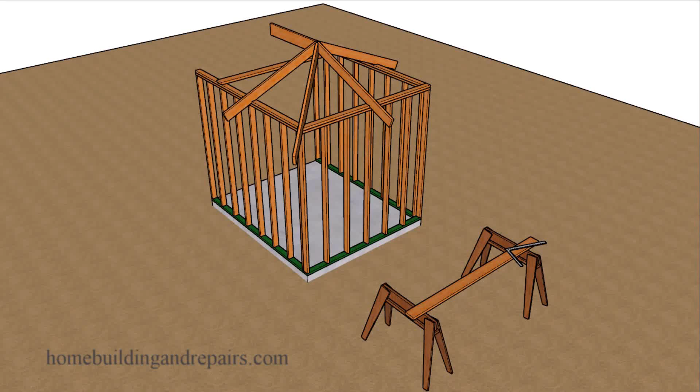In this video, I will provide you with the method used by old carpenters, before the calculator came out. It's rarely used today, but that doesn't mean you can't benefit from this method. It might be easier to understand and something that will work for you.

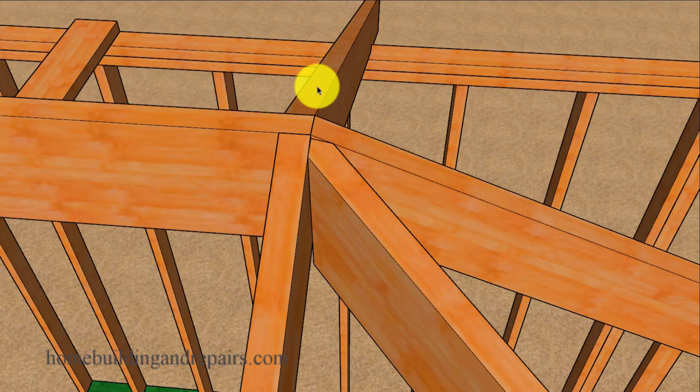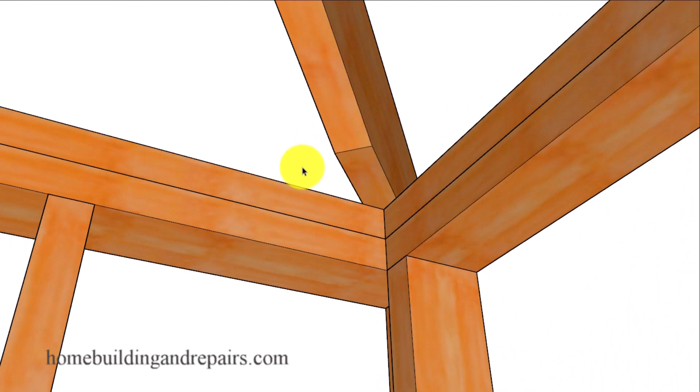The first thing I want to do is show you how we're going to use three common rafters that are exactly the same size to locate the intersection point for the hip rafter. This is probably the most common method used. However, the hip does hang down a little bit and it will protrude past the framing plates. Nothing you can do about this either, or should I say, you might be able to do something about it if you use smaller lumber or wider framing plates. And of course, the seat cut here.

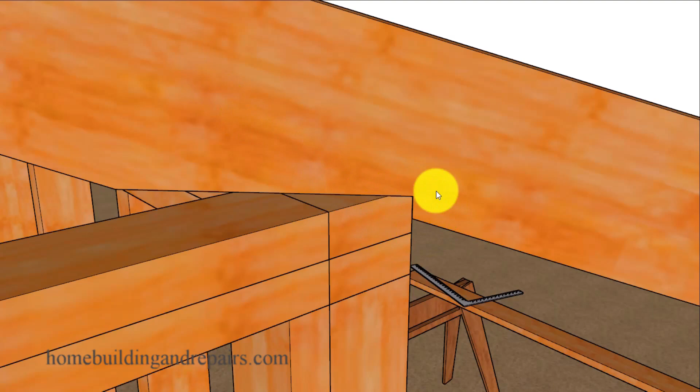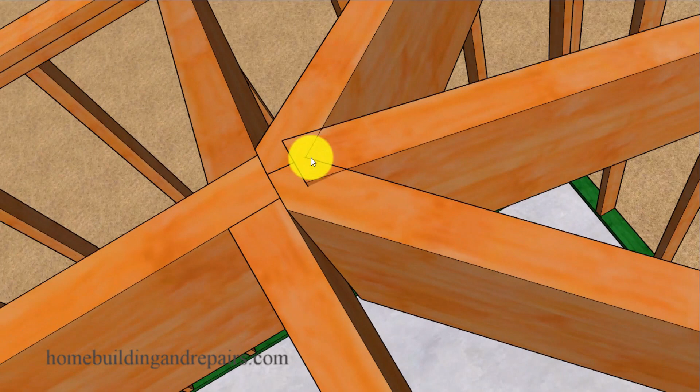Now let's take a look at the second method, the one we're going to be using in this video. It's going to have the same seat cut on the bottom, however at the top we will have a different cut. I went ahead and left the other common rafter in to give you an idea of what we did, along with how far we extended the hips to make it work. This design will provide the lower section of the hip with a little more support as it rests up against the ridge.

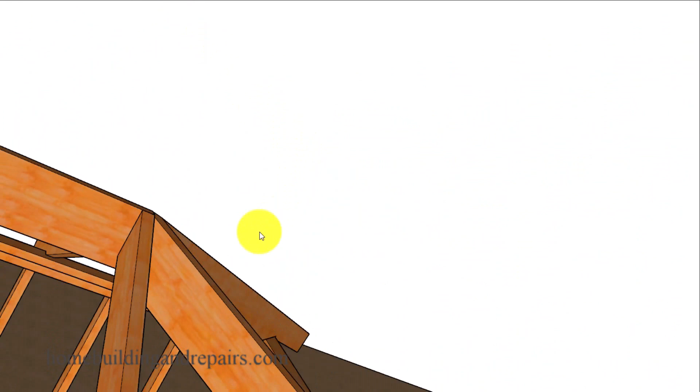It's common to use a larger board for the hip. In our example here, we have 2x6 common roof rafters and 2x8 for the hips and the ridge. Even though I'm using this method here, you can choose either method to lay out your hip rafter.

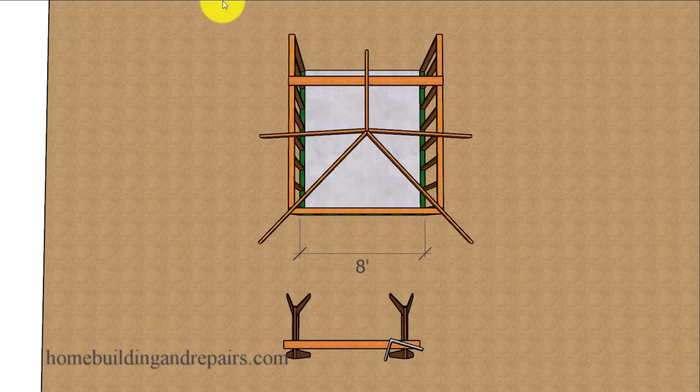We will be working with an 8-foot span, 8-foot distance over on the outside of the wall to the outside of the wall. If we divide that number in half, it's going to provide us with 4 feet. When it comes to laying out our hip rafters, we're not going to be using the 12 inches anymore. We're still going to be using the 5, just not the 12.

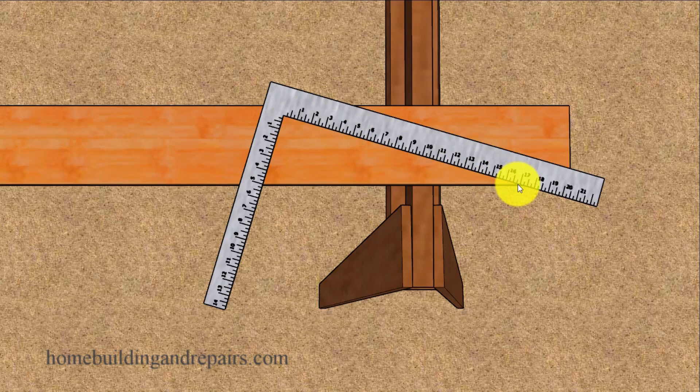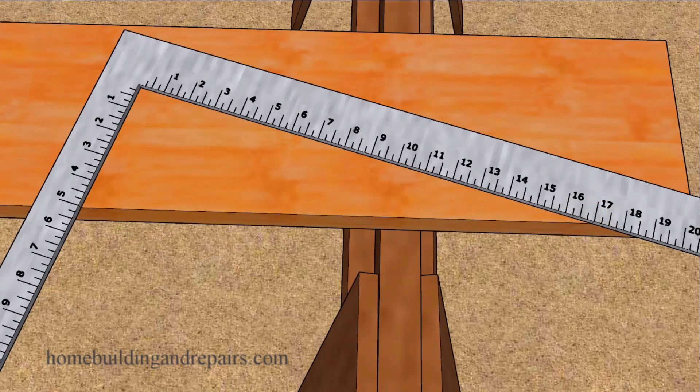Next up, let's go ahead and zoom in here on the framing square. You can see where we have the number 17 and the number 5 here, where we're lining up this part of the framing square and this part with the edge of the lumber. So again, the number 17 here and the number 5 on the other side.

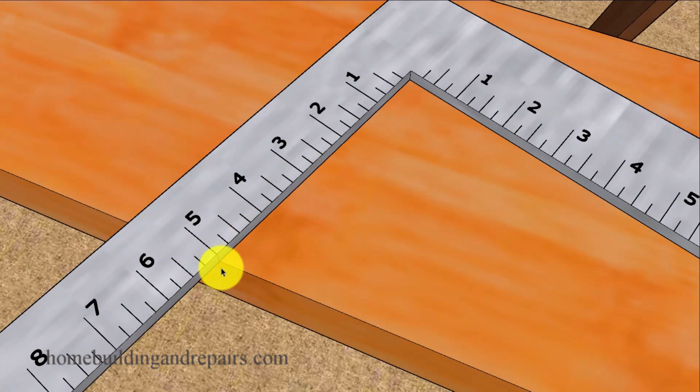You will change this number here if the roof pitch changes. For example, if we were using a 3 and 12 roof pitch, then we would be using the number 3 here instead of the number 5 and lining the number 3 up with the edge of the board. That's probably the only change you're going to need to make when laying out a hip roof rafter with a different roof pitch. So the number 17 will stay, this one here will change.

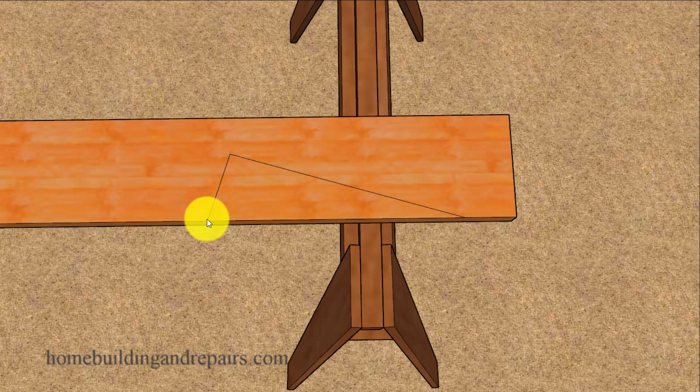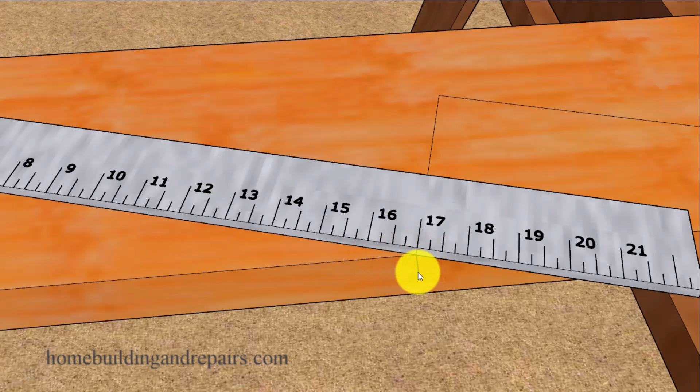The next step will be to mark the inside of the framing square with our first section so that we can move the framing square or slide it down while lining up the same numbers again. So we're going to line the number 17, the inside of the framing square, up where this line intersects with the outside of the board. I put a little mark there to make it a little more clearer or obvious about what we're doing.

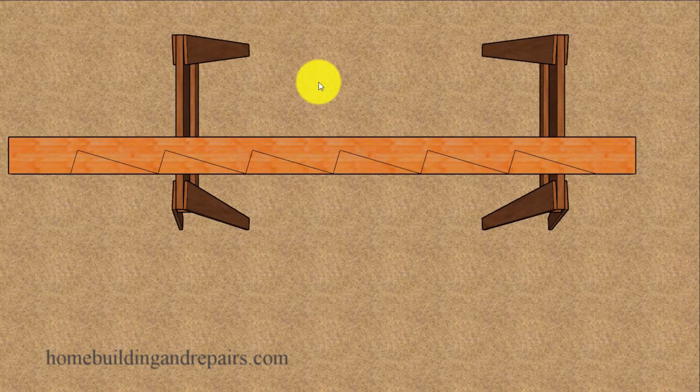Again, the number 17 and the number 5, and then we're going to mark it again. When you are done, it should look something like this. The reason why I have 6 of them, 1, 2, 3, 4, 5, 6, is to allow for the overhang or the eaves, the bottom section of the roof framing.

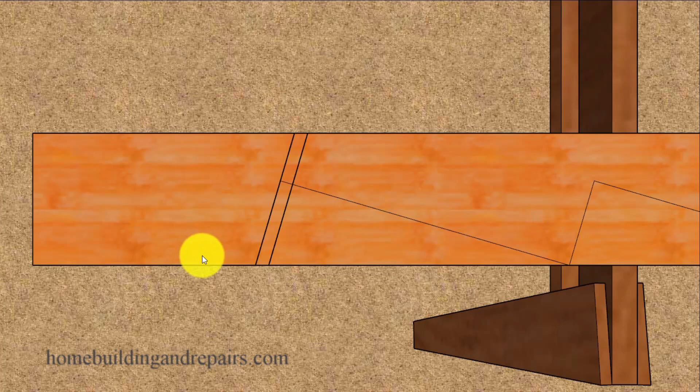Now in this next example, I'm going to move this line back 3/4 of an inch, or half the thickness of the hip. For example, if we're going to have a hip that is 1.5 inches wide on the edge here, then we're going to move this back 3/4 of an inch. That measurement is going to come square off of here. This might make a little more sense as we go along in the video.

So the theoretical measurement for the point that the hip intersects the ridge at the center point is going to be right here, the end of this line here, and then we're going to come back so we can cut a 45-degree angle on both sides.

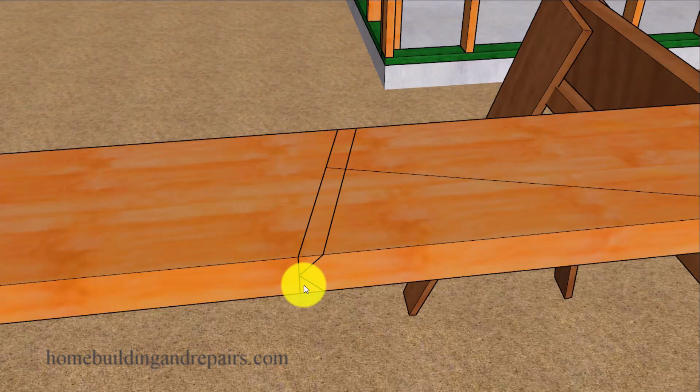Again, this point right here is going to be the point where the top of the hip intersects with the other hip along with the center of the roof ridge. These lines will be cut at a 45-degree angle as long as you're using a standard hip design. So again, the center point here is the theoretical measurement where it meets the center of the ridge and butts up against the other roof hip, along with part of the common roof rafter.

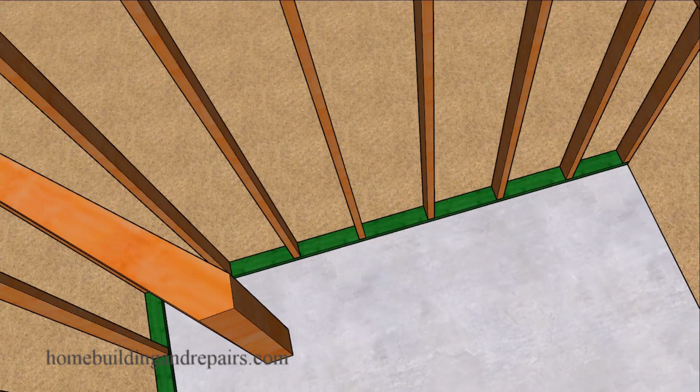You will need to deduct a little more if you're going to use the first example in the video where we had 3 common roof rafters here. And if that doesn't make sense, don't worry about it, because you'll be able to make minor adjustments to the first hip you cut, and then use the measurements from that one to lay out the other hip or valley roof rafters.

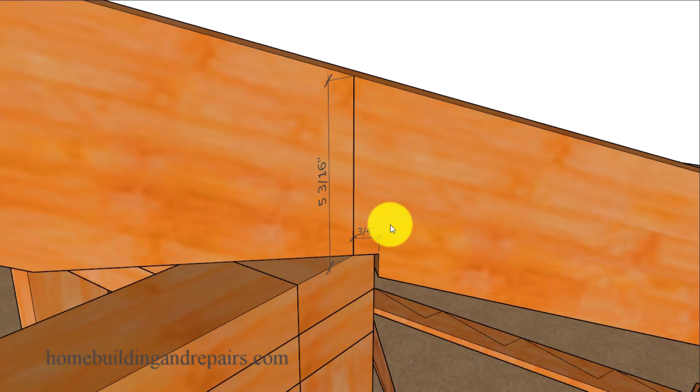This is where it can get tricky. This measurement here will be the same as the measurement on our common roof rafter. The only difference is that we're going to have to come in half the thickness again of the roof framing hip. And in some cases, this measurement might be a little different than half the thickness.

So here we have 5 3/16 of an inch measurement lining up with the wall. And if we go over to the other side where we have our common roof rafters, we've already cut our common roof rafters with the seat cuts we want. To get this measurement, we're going to need to lay out our common roof rafter first.

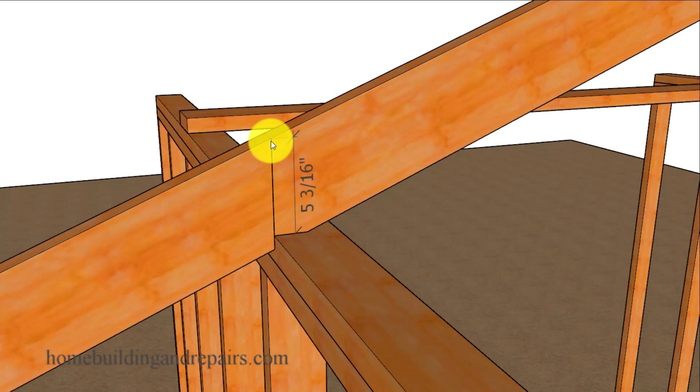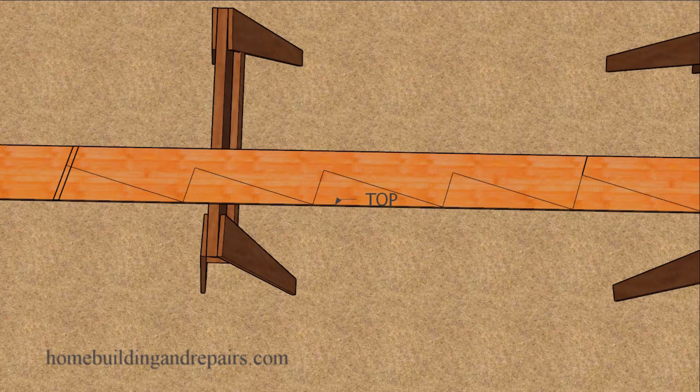I know a lot of carpenters, and I've done it myself, drop the hip roof rafter. There's really no need to do that if you use this method here. So again, we're going to have a plumb line, or a vertically level line, there. And as long as these measurements are the same, everything should line up and create a nice flat roof plane at the top and bottom of the roof rafters.

Next up, it wouldn't be a bad idea to mark the top of the hip. Just simply write top on the top section to avoid any confusion, because this is going to be the bottom. This is where we're going to be working on our seat cut.

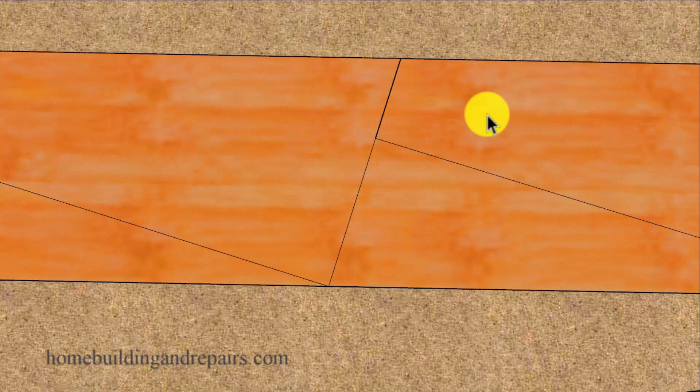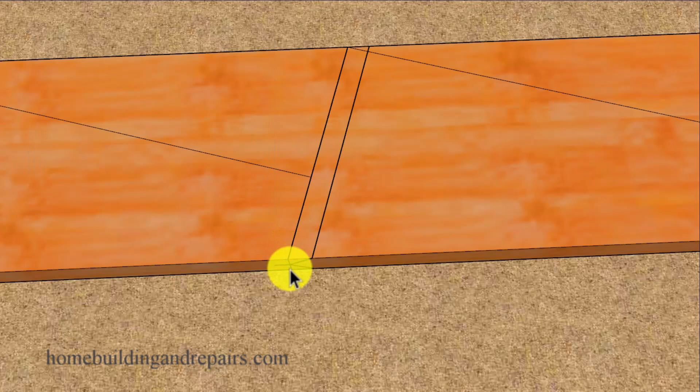If you remember, we had to move the line over 3/4 of an inch, and this is so that we can get the measurement we need for our 5 3/16 measurement. So here's the theoretical length, or the end of the hip. This would be at the end of the wall. Corner of the wall would be right here. And this is the line we're going to be cutting, not this one.

To find the location of the top of the seat cut, we're going to start from this point here. I'm going to pan out a little bit so that you can get a better look at this, along with this line here. Remember, we came in 3/4 of an inch, and we're coming in 3/4 of an inch here. By the way, the measurement at the top, from here to here, and this one from here to here, is going to be exactly the same, for those of you who might have a difficult time figuring out what we're doing here.

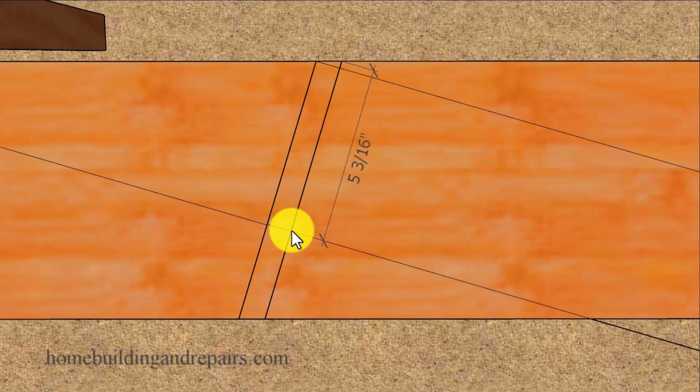So again, we're going to focus on this one here and measure down from this point here, 5 3/16 of an inch. Don't be confused with this here. Do not think that this is important, or that we've made a mistake here, or that you can just cut this line for your seat cut, because it might not work out for you.

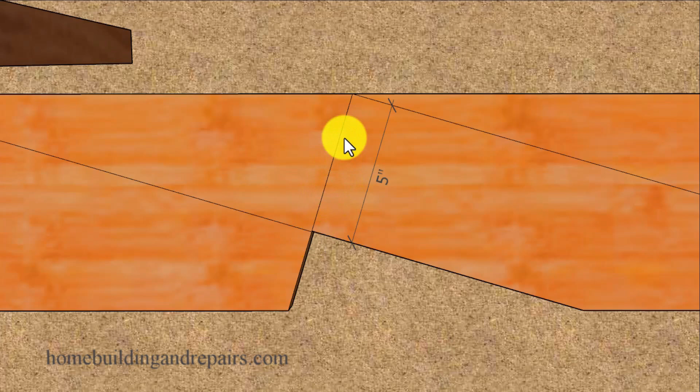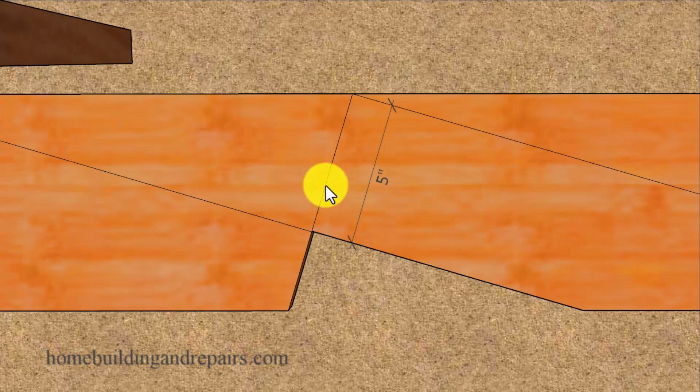So let's go ahead and cut this line. Remember, I got rid of this line, and we're cutting this line here. And if we measure this, it's going to be about 5 inches. So again, don't get confused if you measure this distance here and it's off a little bit, because the measurement we were focusing on was 3/4 of an inch in from this line here. So here we have the bottom of our hip roof rafter.

After we cut the top at a 45-degree angle on both sides, we're going to have a hip roof rafter that we're going to be able to set into place so that we can double check all of our measurements.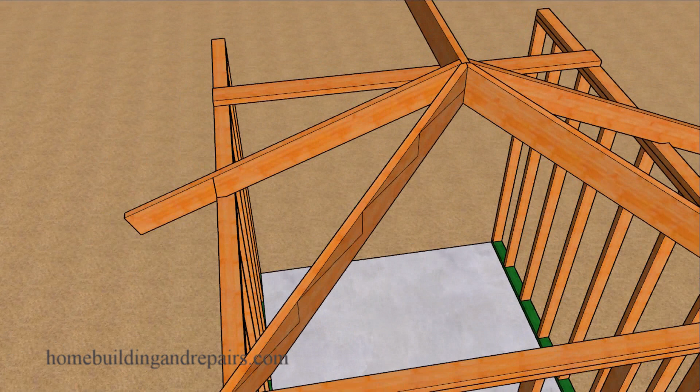So here we have the top lining up nice, and then our layout lines. Now, I didn't point this out earlier, but if you remember, we had an 8-foot span. If I cut that in half, we're going to have 4 feet, or 4 separate sections, which we have here: 1, 2, 3, 4. These are the sections we're going to use to lay out our seat cut and our plumb cuts at the top.

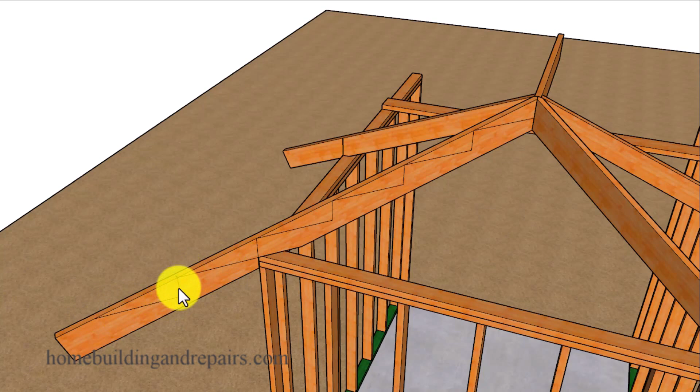And the other 2 sections are going to be for our overhang. If our overhang is 24 inches, or 2 feet, then you're not going to be able to measure over 2 feet from this corner. You're going to have to use the 17-inch lines again, and then try to go a little bit further, maybe 3 or 4 more inches, just to be on the safe side.

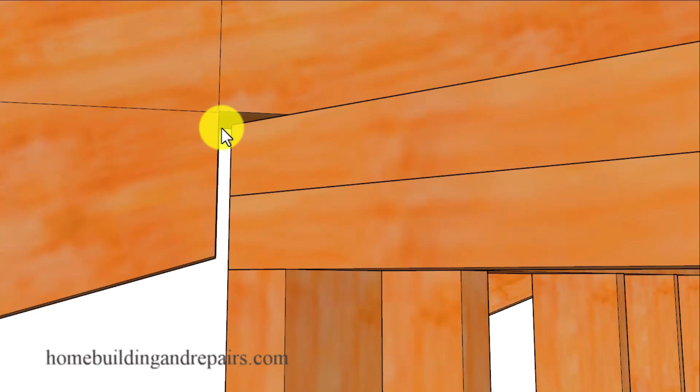Now here's the problem you're probably going to run into: a gap at the bottom. This gap is the result of using 17 inches instead of 16.97, which is the actual number we need for our hips. And the longer your roof rafter is when you're using the step-off layout method, the larger this gap is going to be. That's another reason why you might not want to use this method.

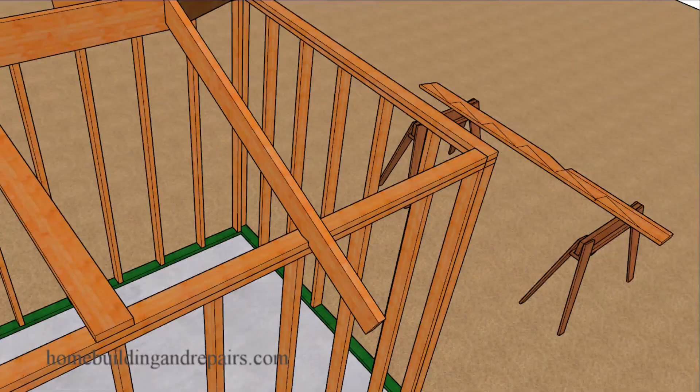But don't worry, because our hip rafter is actually a little longer than it needs to be, so we're going to be able to cut some off of the top.

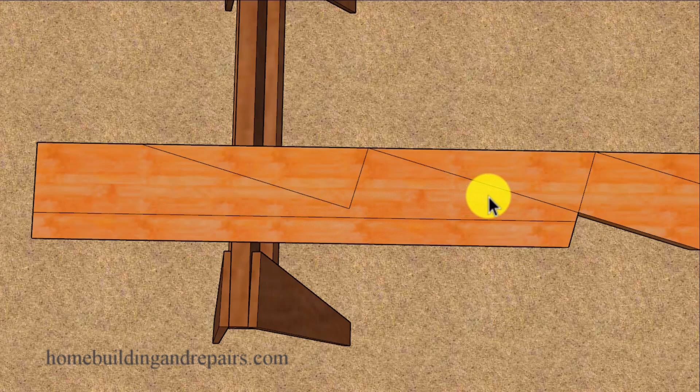Now before we do that, let's go ahead and remove 2 inches from the hip here. Remember, our common rafters are 5.5 inches, they're 2x6. To make everything look nice from the bottom, we're going to have the end of the hip rafter, or the part used to create a nice looking overhang, match the common roof rafters by being the same size. So let's go ahead and cut that.

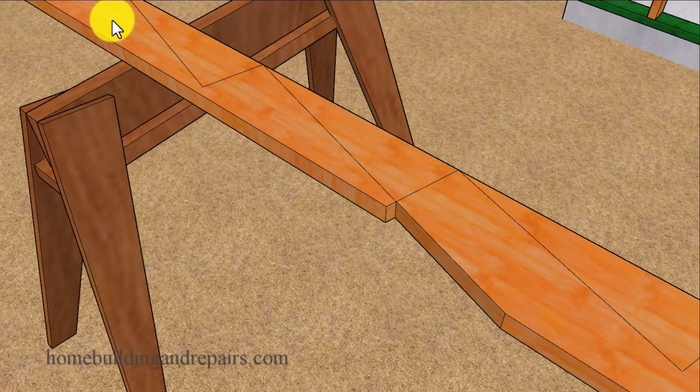This is what the seat cut will look like. And then let's remove 1/8 of an inch from the top section of the hip. You're simply going to measure over 1/8 of an inch and then cut this line here, and then do the same on the other side.

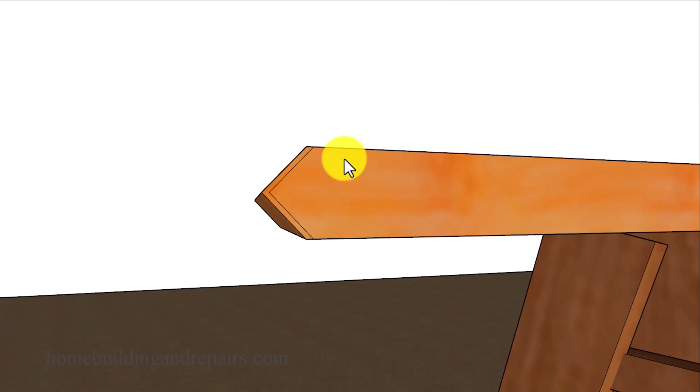So again, this doesn't have to be extremely accurate. You're going to be able to check everything with your first hip roof rafter. Then you can simply measure the distance from the point you need to lay out your next hip rafter and have it work out perfectly.

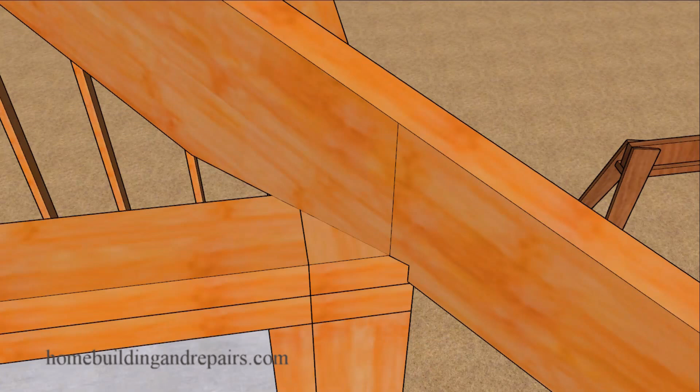And if everything works out, we can go ahead and set the hip back in place. You can always drive some screws in here to hold everything up temporarily, and then go down to the bottom to check and see if the line you made on the hip roof rafter lines up with the edge of the wall framing plates, and that there is no longer a gap at the bottom.

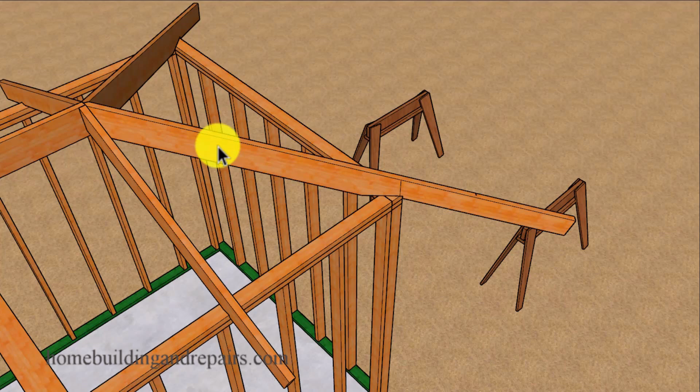And if everything passes your preliminary inspection and the hip roof rafter fits nicely, then you have done your job correctly. Then you can use the hip or valley rafter to lay out the next hip or valley rafters, instead of using the step-off method for all of the hip or valley rafters needed on your project.